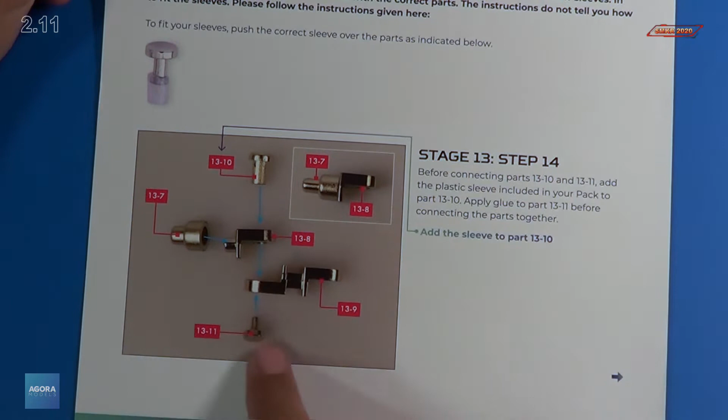There is an addendum to the instructions, and what's cool about Agora Models is they actually came out with additional instructions for building the fingers. They made some improvements on the fingers with these inserts here, and of course we will go ahead and put those in as we build the kit. I think it's fantastic that they actually included that with this.

You can see that they give us about 4 steps in stage 13 for this. So I'll pull this out again when we get to stage 13 and we'll follow these instructions then.

Here's the parts for stage 11, the neck and jaw joints. So I'll go ahead and pull these out and we'll get a closer look.

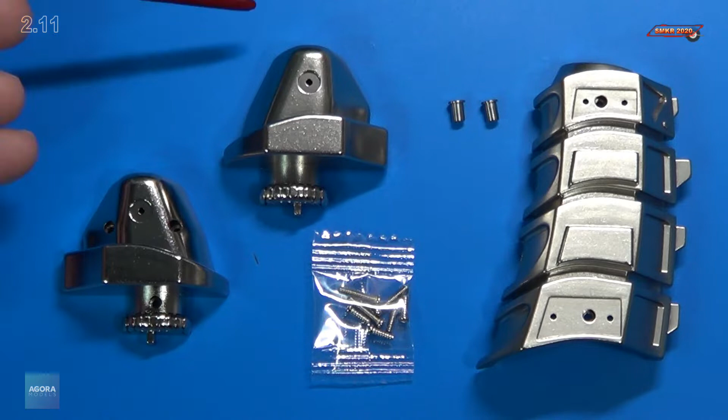Here's a close-up of the parts. We received the neck, 2 neck joints, and 2 brass bushings. We also received 2 different types of screws: 4 PB 2x6 screws, and 3 PM 2x10 millimeter screws.

I'll be right back. Here's a close-up of those screws, and the 2x10 screws have very fine threads, whereas the 2x6 screws have coarse threads, and they're both button head style screws.

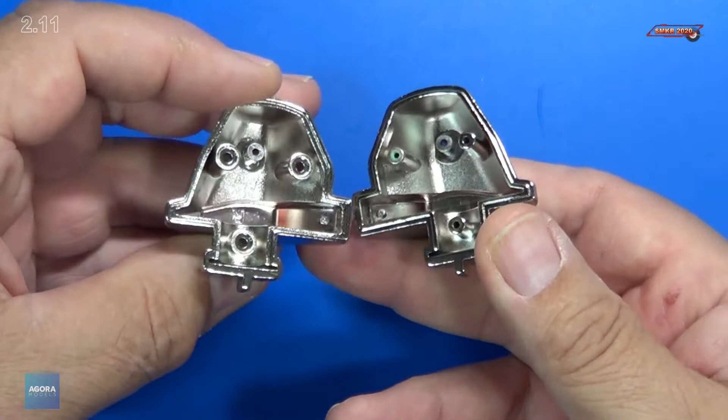So we'll simply match these sides together here. They are tabbed, with three markings there, and they want us to use 3 2x6 screws, which are the PB screws.

I recommend you use a 00 screwdriver for this because it has a smaller shank to it. It will fit inside the hole there a little bit better. Get it pushed down in there and get it started.

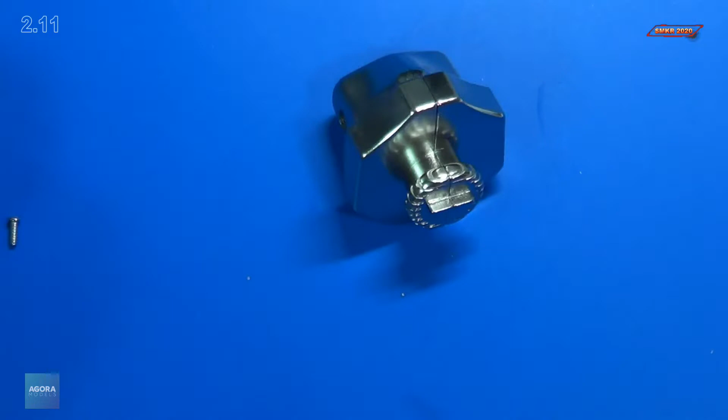And it's tight. And we got one more on the bottom. It's right there.

Keep pressure on it. There we go, that is it with that.

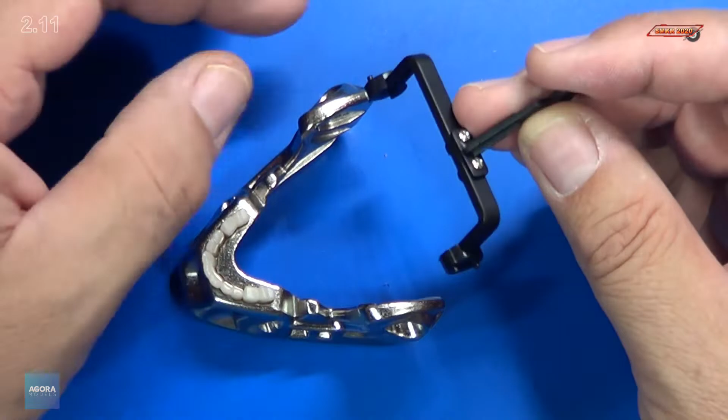Next, for steps 6 and 7, we need to get our lower jaw and head motor joint from stage 6 and 7, and we're going to install this just like that configuration. There's a couple of tabs on each side here, and it's simply going to go down into the sockets, just like that. That's how that looks there.

Next, we gather the lower jaw part from stage 5, and you'll note that there's an attachment point right there for a screw, and on the other side for a screw. So for step 9, we take and insert this just like that into that.

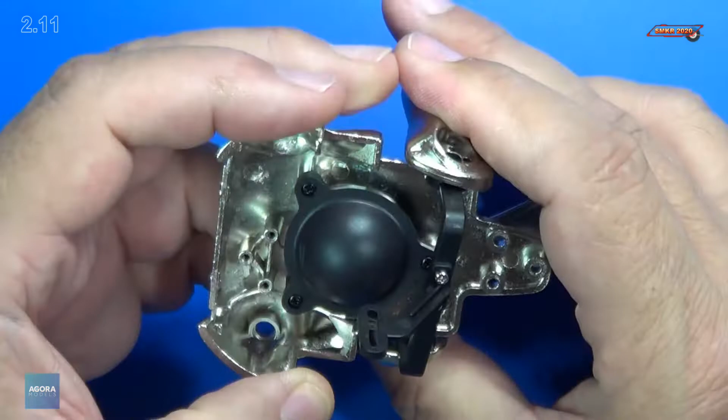It just slides up in there. It's kind of a tight fit. So once our jaw is in place, and we had to press it up in place here, very tight squeeze on both sides of the jaw joints, but they are lined up now. Our holes here are lined up.

The next thing they want us to do is put the bushing in. So we put a bushing in on the side. This is going to take us all the way through step 14 where we complete this build.

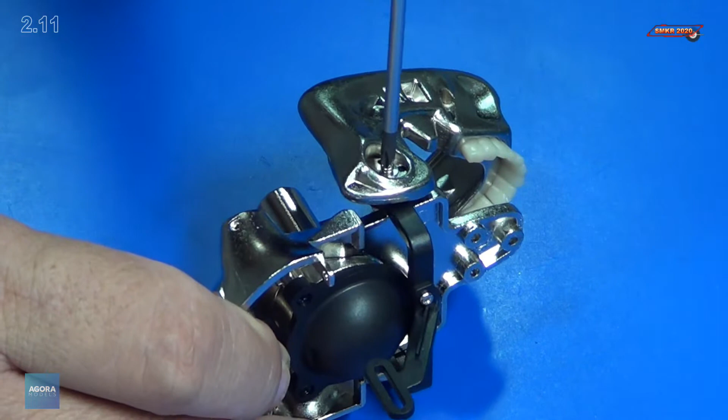So once the bushing is in place, then we can put our screw in, and that is our PM screw 2x10mm, and that's going to feed into some threads that are found in here. On the other side it's already threaded, which makes it nice, and I don't want to screw it down too tight, just till I have a little resistance, and that's it.

Do the other side. We'll put the bushing in on the other side, just like that, and put our screw in on the other side. Goes right down in there. Perfect.

And we've got freedom of movement there. You can see it looks good on this side, looks good on the front, and looks good on the other side. Very smooth operation, very precise, looks great.

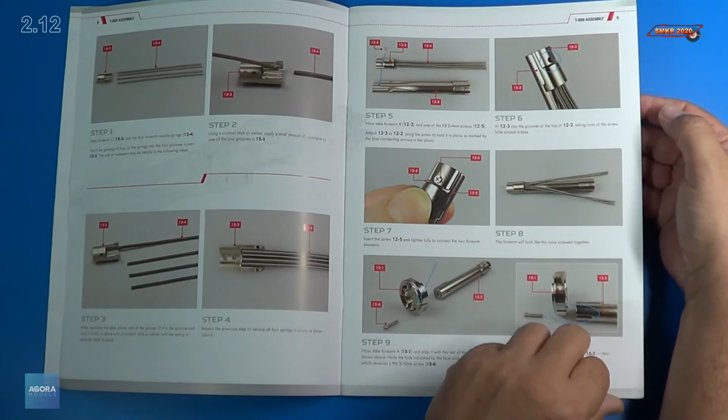And a total of 9 steps will be involved with this. So let me get the parts out, we'll get a close look, and then we'll start the assembly.

Here's the parts for stage 12. Let me pull these out, and we will get a closer look at these.

Here's a close-up of the parts for the right forearm. We received part A for the forearm, part B, and part C. We also received the forearm muscle springs and 2 sets of screws.

We received KM screws, 2 by 4 millimeter, and they are very tiny screws with countersunk heads. And then we received larger screws here. These are 3 by 12 millimeter, and they have a button head type screw to them.

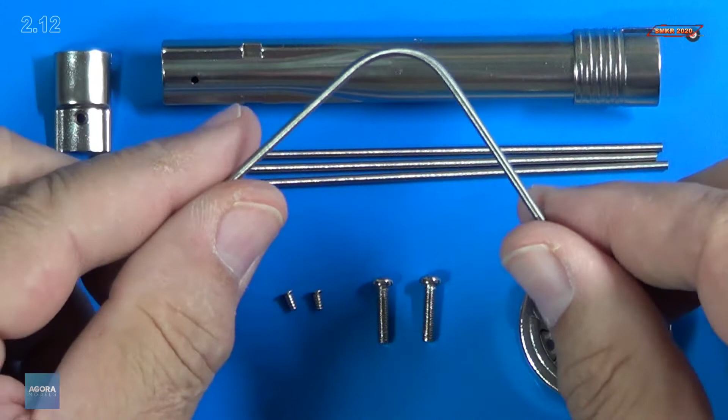The springs themselves are pretty cool here. Very springy. See that? I mean, they go all over the place. Pretty cool.

So let's get started. The next few steps require super glue, and this is my super glue of choice for this. We're simply going to lay down some super glue in these grooves here and put our springs in place and lock them down. To help the super glue dry a little faster, I'm going to use some accelerator, or what we call a kicker, at the end to lock everything in place.

So I'm going to take and apply my super glue where it needs to go. And I am using my super glue looper tool. All this can be found on my Amazon store. Just make sure I have enough glue in here on everything.

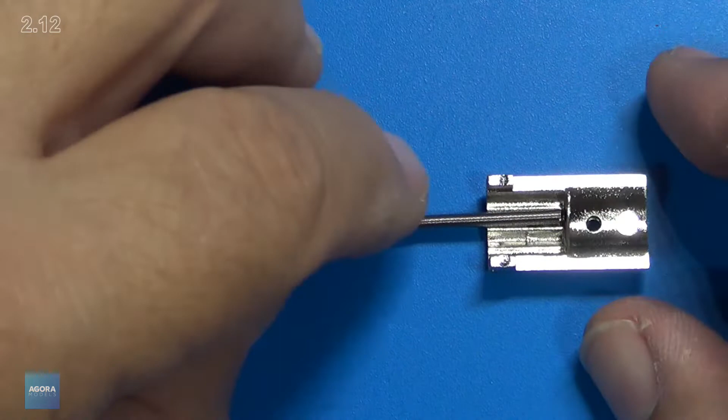Move the glue out of the way. Take our springs, insert those where they need to be. Again, the other one, and that one, and that one.

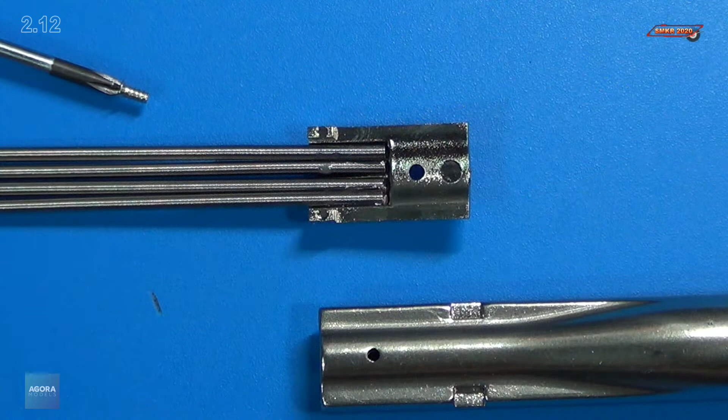Everything's inserted here. Take my kicker and hit it. Next we take the forearm and the connector here with the springs, and we insert that to line up with the notches, just like that. I did put a little extra super glue inside of here to make it a little stronger.

Now we're using those smaller screws, the countersunk screws, and that's simply going to lock this all down in place. Remember, all these parts are metal except for the springs. That looks good.

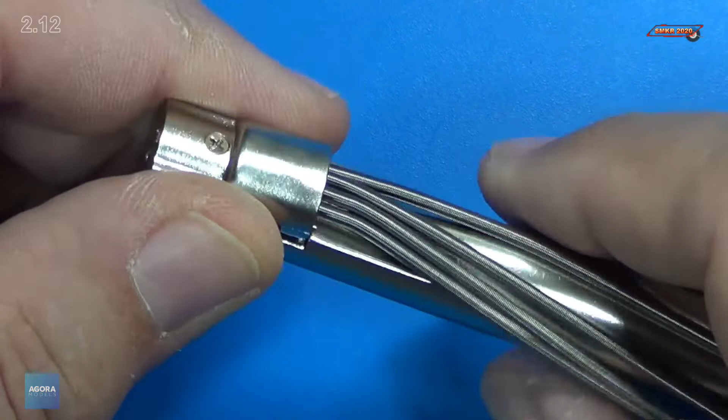Next we take our forearm. That's it, this completed, and we're going to insert this other piece of the forearm on the end of it. We're going to use a 3x12 screw, which is the larger one we received with this pack. The way it lines up is you have two sides to this arm here. You have this side that looks like that, has the indentation right there, and then the other side looks like that. So it's actually going to connect up with this up against the arm.

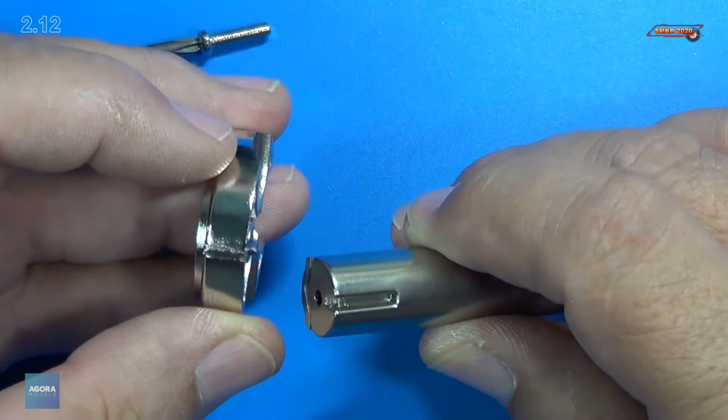Now what we need to do is line it up. We line it up with this groove to the groove that's found on there. On this side there's only one groove, so it's basically going to go on just like that. You can see there's a screw hole here and a screw hole there.

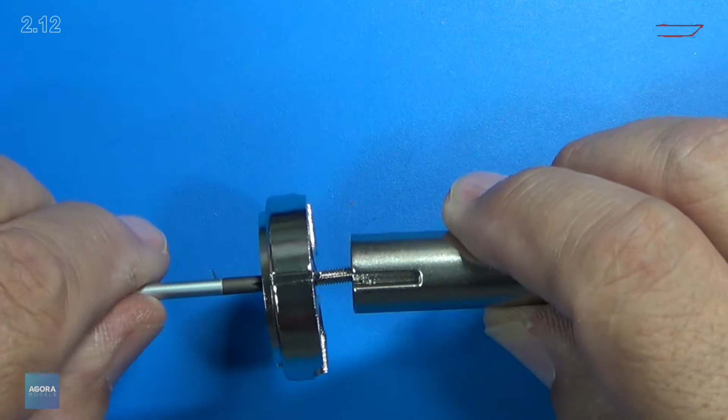I'm going to take my larger screw and put it through the end piece first, and then I can line it up from there. Just like that, and get the thread started. These are all plastic. You can see just gravity is keeping it locked in where it needs to be.

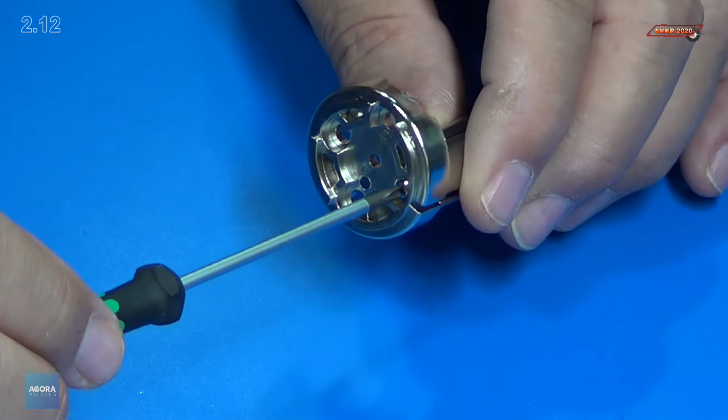Back it out a little bit. There we go. And push it forward. There we go. Perfect. Turn this around, we'll tighten this down on the other side here. And that's how it looks.

And that completes stage 12. Had a lot of fun with this too. I've noticed with this build we use a lot of super glue, but that's fine.

Welcome back. Let's look at the instructions for stage 13. So for stage 13 we assemble the neck and right finger component. Looks like we've got a lot of parts involved with that.

As I proceed here to the instructions themselves, we have 12 steps on 2 pages right here. Looks like we'll do the neck first for that stage, attach it to the head a little bit, and then we go to assembling the finger, and we have 15 total steps. So I'll get the parts and I'll be right back.

Here's the parts for stage 13. We get more pieces here for the neck, and of course our finger. So I'll take these out, we'll get a closer look, and we'll start the assembly.

Here's a close-up of the parts. We received the right side of the neck and some plastic plates. The neck is also plastic, and pieces of the finger. They call it the right fourth finger. And of course the new parts that are included with this stage.

And we received some PB 2x6mm screws. We received this nice letter of addendum for stage 14, step 11, and it lists the parts that are included here. Basically you're putting the plastic sleeves on these tabs here, and they give us step-by-step for that, so I'll take you through it and it shouldn't be a problem.

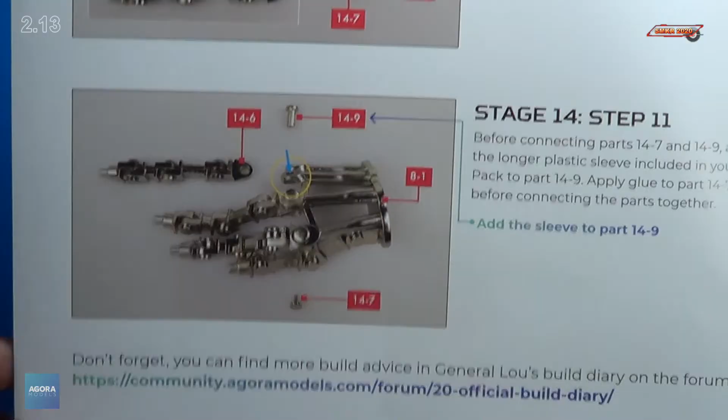In step 4, 5, and 6, we're going to assemble our jaw assembly we assembled from stage 6, and it's simply going to go into the neck here. Also, you have some alignment tabs there. You can see how they're positioned in this direction, and that's simply going to insert into that.

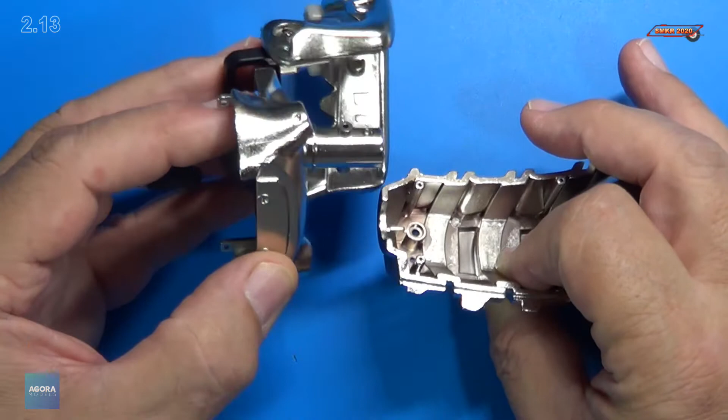It's going to insert just like that. Flip it over. Once again, putting our PB 2x6 screw into this. That's good there.

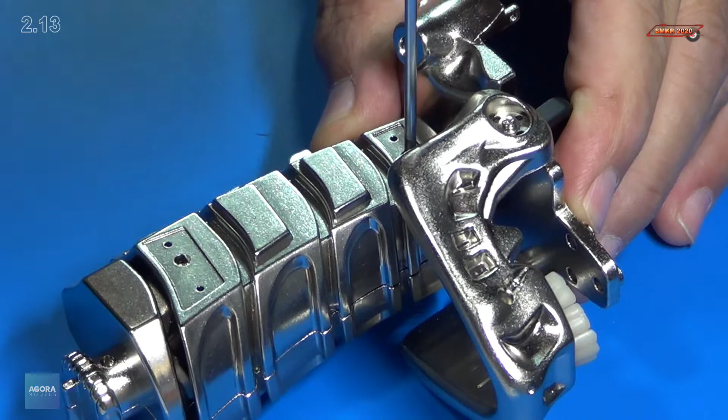Next, for steps 7, 8, and 9, we're going to put the other side of the neck on, and we want to make sure it lines up like it should. Snap, snap, snaps right down on it. We're going to put 2 more PB 2x6 screws into this. That's good there. One more on the bottom. And that's good there.

Now we receive these plates, and they are going to get installed on the outside here. Looking at these plates a little closer, you can see they are actually labeled. They have an L or an R on the back side. We'll go ahead and cut these off.

I have a really nice pair of Tamiya sprue cutters, and you can find that on my Amazon store. These allow you to get really close to it. You can just clean them off just a little bit here.

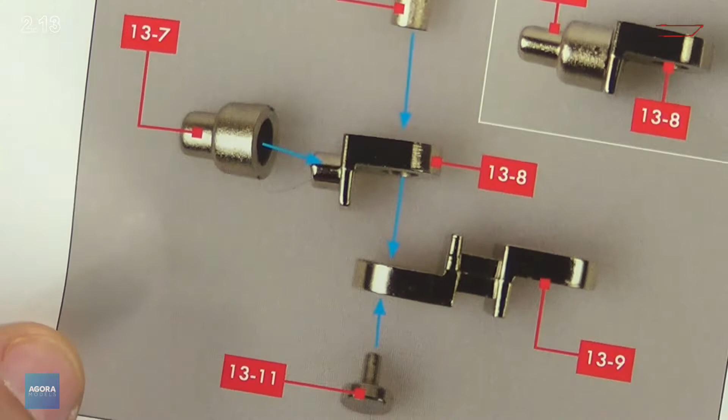I'll move that aside and we'll start on the finger. Here's all the parts for our finger. And remember, they gave us that addendum to add basically the plastic insert, and you can see how that works with that also.

We're also going to need some super glue for this, and I will use my glue looper to apply the super glue here in a minute. And this inserts into that.

This plastic insert goes over the outside of that, and we basically put these two together like this.

We put this through the top first, and through the bottom. Just like that, and they want us to put some glue on there. I think I'm going to have to apply some glue to this also, so we'll do both.

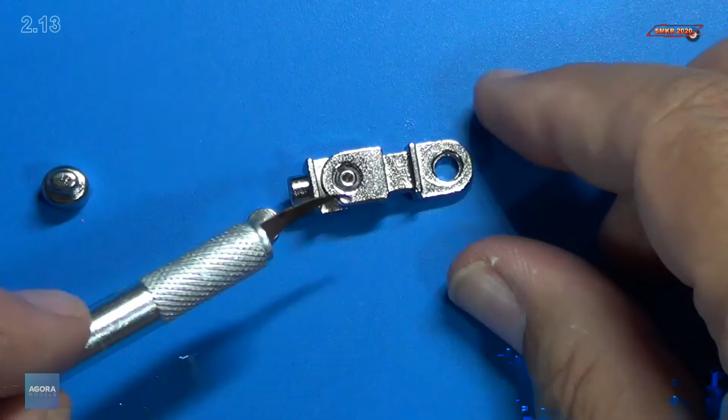Some glue on this, and some glue right here. It only goes on one way. There we go.

And then we put our cap in on the top, with the glue. Perfect.

Take a little bit of accelerator and hit that with the accelerator. It does give us a capillary action, so it should get into there, and that'll make the super glue dry faster. And that completes stage 13.

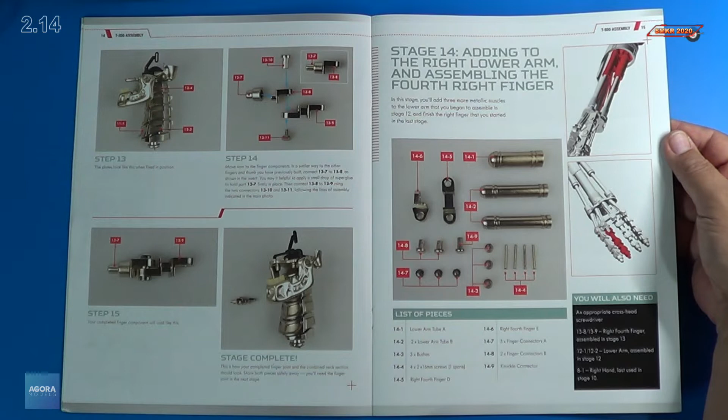Welcome back. Let's look at the instructions for stage 14. And here's the parts breakdown for 14 over here on the right. Got a lot of parts here. Looks like we're going to be building the right lower arm and assembling the fourth right finger, right there.

Look at the instructions, and we have a total of 10 steps on 2 pages here. We're going to be utilizing that arm that we built previously and assembling the arm and whatnot along with the fingers and continuing on with the fingers there. Looking great so far, all the way up to step 13. So let me get the parts out, we'll get a closer look, and we'll start this stage.

Here's the parts for stage 14. Lots of little parts bagged in here. Looks great, and let me pull these out, we'll get a closer look. Here's a close-up of all the parts.

We received the lower arm tube A and 2 lower arm tube Bs. We also received our finger components: the longer portion here for the knuckle, and the 2 other shorter ones are for the finger joints. We also got the 2 by 6 millimeter screws, there's 4 of them there, and we have the caps. Let's go ahead and get started on this assembly.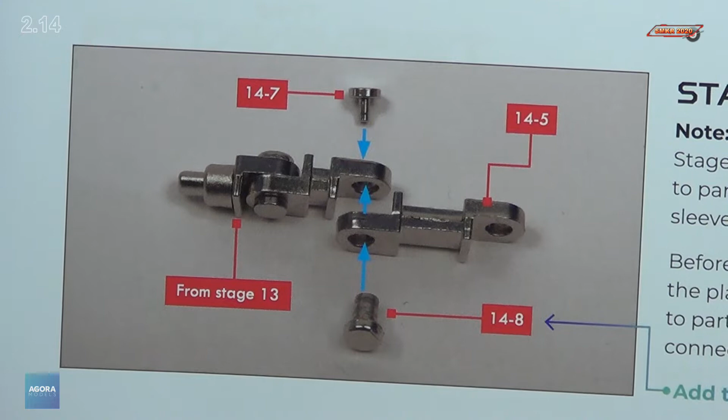And don't forget, our instructions addendum tells us about the new plastic sleeves that get installed on this, because they're not in the original instructions. So there's 3 steps provided for stage 14.

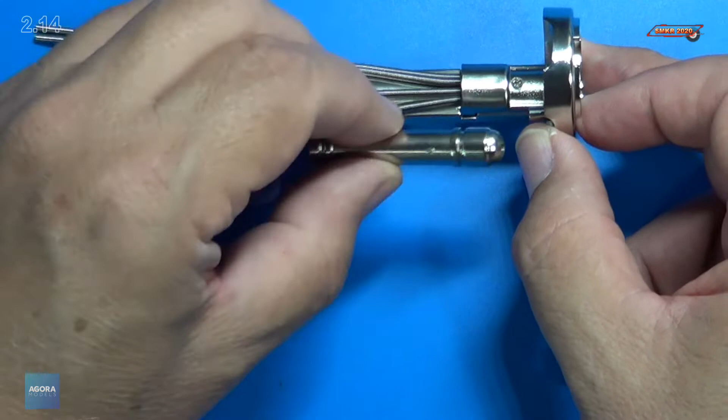Step 1 through 4, we're going to be assembling a couple of tube assemblies. We're going to start off to the right of the arm, there where the arm is screwed in to the end there. We're going to put the bushing in to the right, just like that. Then we're going to take our tube and mount it to that bushing, just like that. Then I'm going to take my screw and feed it through that.

And proceed to tighten it down. This screw is that real long 2x16mm screw. And if you can see that, until it's tight.

There we go, and you can see there's some give back and forth with that. I'm going to check it one more time to make sure it's tight. It is a countersunk screw. It looks great. We're going to repeat that on the other side.

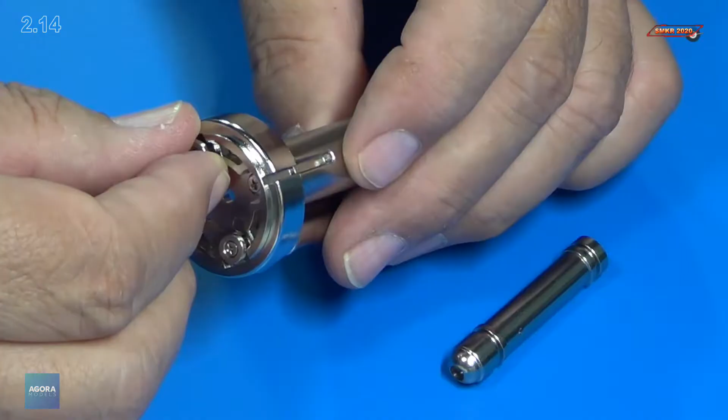Once again, we're going to put our bushing in on the other side here. Now this goes to, we'll be completing our step number 5 when we get this done. And we'll put our tube on that, goes on there very, very simply. Feed my long screw into that, the 2x16mm screw, and screw it in.

Perfect. So that's those two on there. Pretty cool, okay.

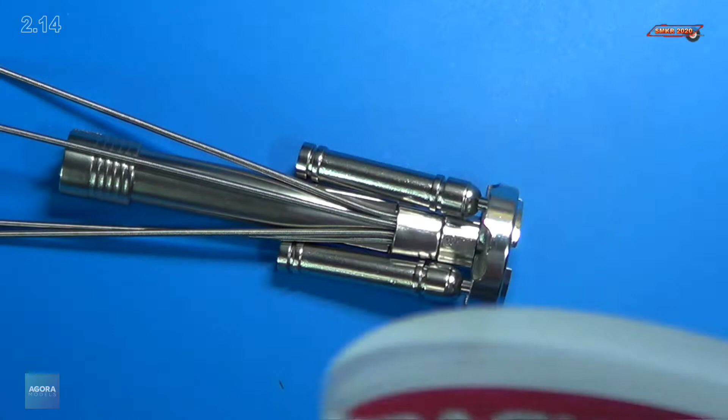Now we got one more to do. We've got the shorter tube. It's going to go in on the end here, much like the other. We're going to put our bushing in on the end of it, just like that. Get my screw ready here, insert the tube on the end of the bushing, put my screw in - a two by 16 screw - and secure it down. And there it is. All three of them are in.

You can see how they're all available here on the end cap. So that completes us all the way up to step 9. Now let's get to step 10, where we do the fingers.

We get our finger from stage 13 that we just assembled previously. We line up the two fingers that came with this kit. We install the Teflon just like we did before, and it goes in on the bottom here. Slide that through, push it through, just like that. That feeds through, through that.

Now we'll get the finger and put it on the hand. So we have our hand here. We're going to insert it right here for this finger. This is going to go just like the other ones, just like that.

So we'll get our connector ready. This is considered the knuckle one, which is the longer one. Put our Teflon sleeve on it - the Teflon sleeve is actually a little longer also. Perfect. Going to feed that through the hand first, just like that. We'll get our finger lined up, and you want to make sure it goes in that direction, down.

Take my pliers, squeeze everything together here. Holds pretty good when you do that. Take my super glue, tap it in the middle, in the center there. That's why I like this looper, it really gives you some precision. Take my cap, put it on top. There you have it.

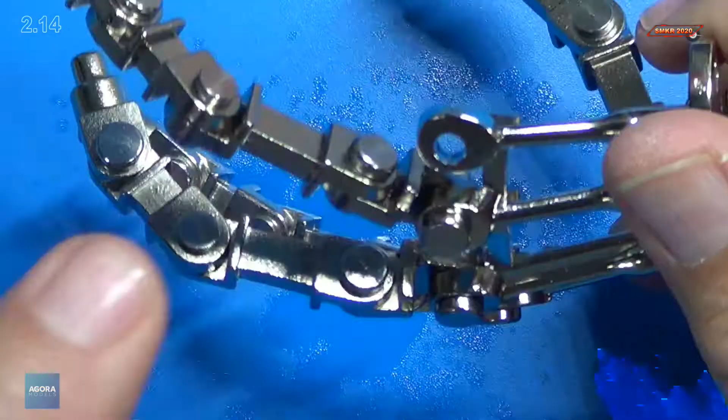I'm going to take my super glue accelerator, or my kicker, and I'm going to hit all these parts that I just glued. Capillary action will get them to work. And we got one more finger to do here. That looks great. I'll be right back. And that completes stage 14.

Wow, we did a lot here. It was a lot of fun getting the rest of this arm assembled, and relatively easy in that aspect, and assembling another finger for the hand. So stay tuned for stage 15 coming up very shortly.

Welcome back. Let's look at the instructions for stage 15. So for stage 15, we assemble part of the left head and the fifth finger of the right hand, which will be the last finger finally.

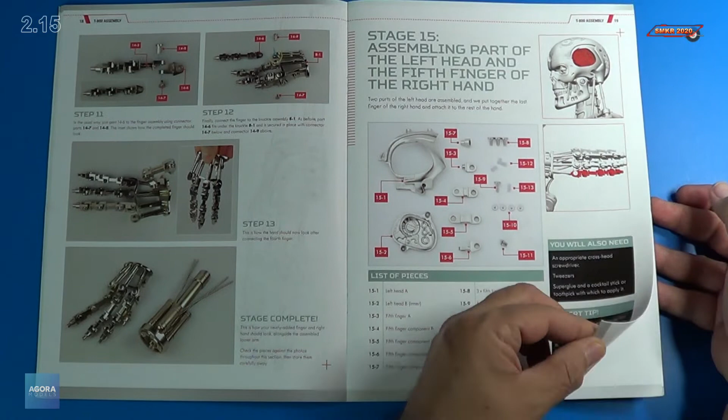So here's all the parts, and it's a good idea to take a really good inventory of everything that you've received in this pack, because you never know, a part might be missing. And what I have noticed, they always give us a spare screw for all the screws that we receive. So that's pretty cool. Looking at the instructions, we're going to work on the head first, and then after we're done with that, we're going to work on that last finger, and of course, install the finger onto the hand. So let me get the parts out, we'll get a close look, and then we'll get started.

Here's the parts for stage 15. And if you'll give me a second, I'll pull these out and we will get a closer look.

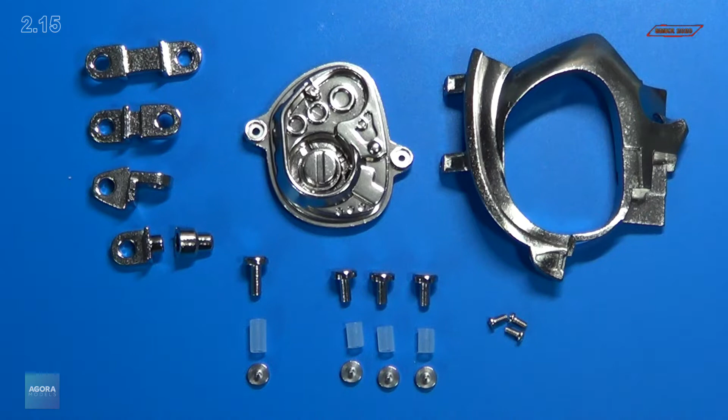Here's a close-up of the parts for stage 15, where we assemble part of the left head and the fifth finger on the right hand. We received the left head components, inner and outer, and the last components for the finger on the right hand. We also received 3 2x4 millimeter PM screws. So let's get started.

Steps 1 and 2, we assemble pieces of the left head, and we'll have to turn this around to do it. We'll put these 2 larger tabs on top just to give us a reference point. We're going to be installing 2 2x4 millimeter PM screws.

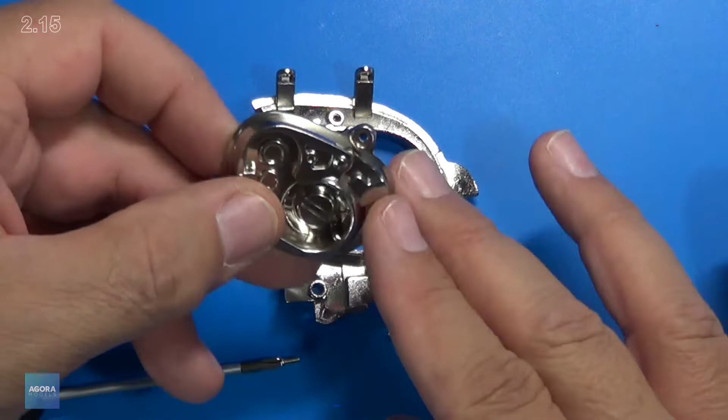We have the detail on this that needs to face the outside, so it needs to go down on top of it like that. We put our 2 screws in, one here, one there. It's already threaded, so we don't need any oil to help us out. And the last one, nice and tight. Very good. That's how it looks.

Let's get started on that last finger. To help us along, I'm going to use my super glue of choice and also my glue looper. Of course, you can find these on my Amazon store. I'll put some on a tray, these little solo cup trays are real handy for that. Some people use them for jello shots or something like that, I have no idea, but that's what they're used for also.

So this is our fingertip. They want us to glue this in place here. It's kind of an oval shape on the end, you can see that, so it needs to match up with the fingertip. I'm going to apply my super glue across that. The other side isn't completely round, it's oval, and we'll match that up. Boom, there we go, that's in place. That was step 3 and 4.

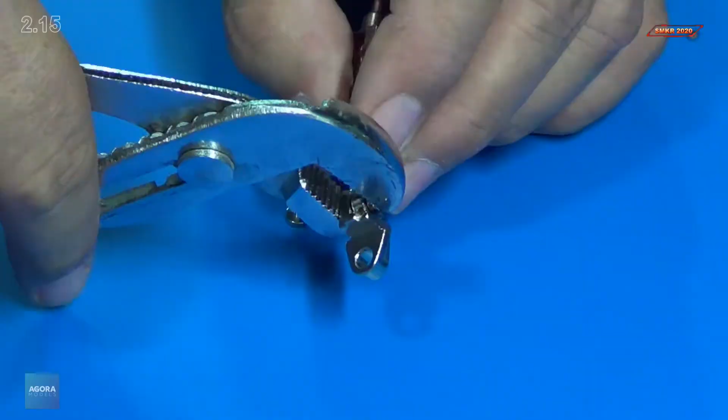Some more super glue, and we'll put our cap on. Perfect.

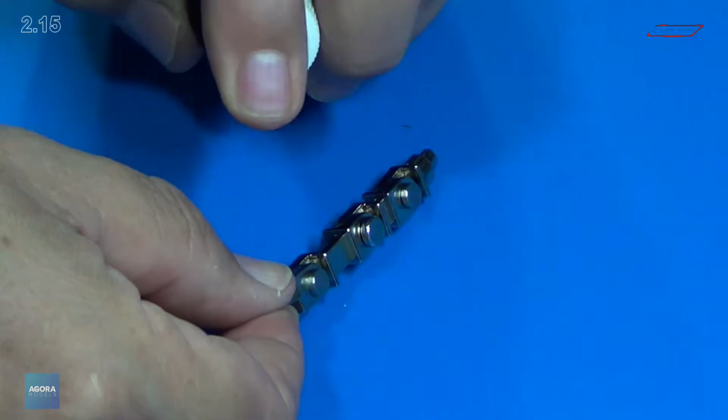To help the super glue dry, I'm going to use my super glue accelerator, or my kicker, and just spray. Capillary action will get it in there and help everything tighten down.

Now we're going to install this on the hand next. So we'll get our hand from stage 14, and with the rest of our fingers we have the last finger to do here on the right. It's simply going to mount up just as before, going in from underneath. Let me get a closer view for you, just like that. And we have the longer joint and Teflon bushing, so I'll go ahead and put that together.

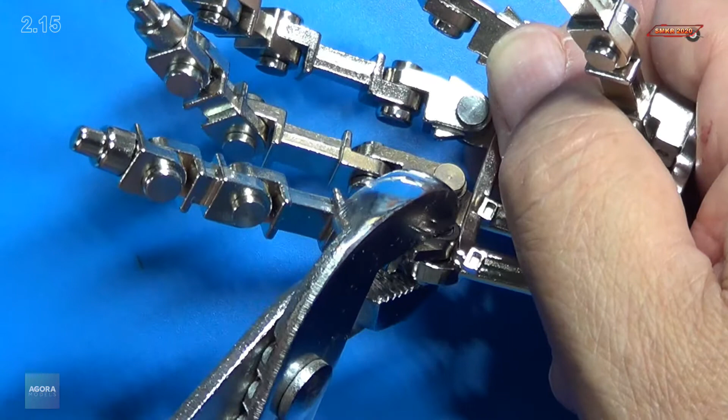It's going to go in through the hand first. So I'm going to lay it down on the bench, put it through the hand, press it through. Take my pliers, still try to push it through. There we go. Then we take our finger, put that on top, take my pliers to that again, squeeze it until there's no space. Looks great.

Take my super glue and I'm going to apply it to the middle. Take my cap and put my cap on. Perfect. To accelerate the super glue, use my kicker and we'll let that dry a bit. I'll be right back. I'm going to take my looper and clean it off with a lighter, just going to burn off the glue. Ready to use another day.

And that completes stage 15. Wow, got a lot done. We actually have one full hand complete right now. I think that's awesome.

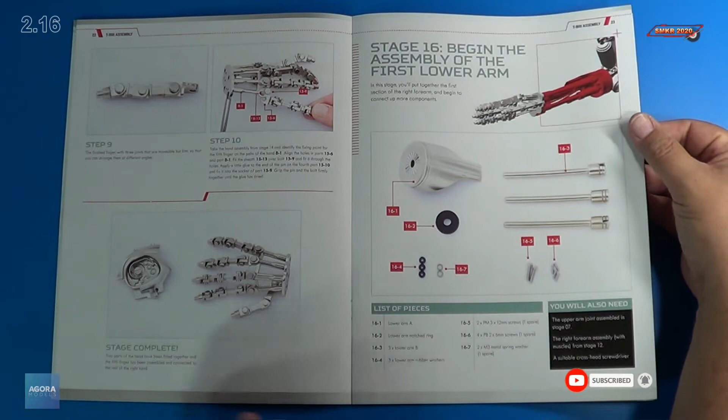Welcome back. Let's look at the instructions for stage 16. So for stage 16 we begin the assembly of the first lower arm. Got a few parts here involved with that, a few different types of screws. The first 2 pages are filled with 7 steps for this process, and a couple more steps after that. So we have a total of 9 steps for this stage. So let me get the parts out and I'll be right back.

Here are the parts for stage 16. Feels very light, so they're probably all pretty much plastic in here. But I'll go ahead and pull these out and we will get a closer look.

Here's a close-up of the parts. We received lower arm A, lower arm notched ring, and 3 lower arm Bs. These are all plastic. This is a rubber material. We received 3 lower arm rubber washers, 2 locking washers, 2 3x12 millimeter screws, and 4 2x6 millimeter screws. PM screw right here and PB screw right there.

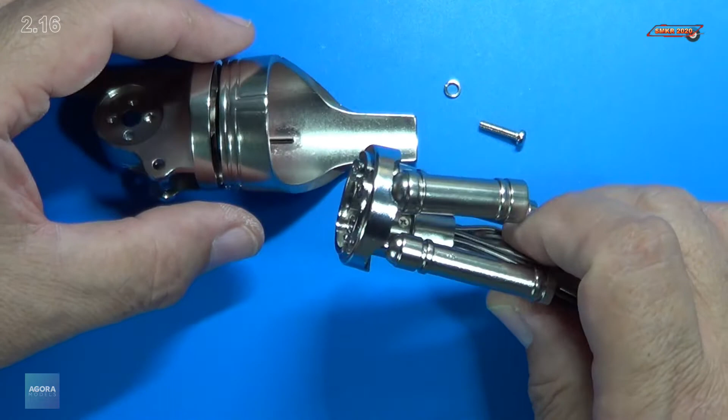So for our next part of this assembly, which is step 5, 6, and 7, we're going to put all these together here. First thing they want us to do is just insert this arm pieces here together, and you can kind of see they kind of ratchet around each other. You can kind of hear it. And then our arm assembly, there is a groove you need to line up here, and that's right there with the groove that's inside there. So I turn this over and line it up and throw it in there.

Now we take our PM 3x12 millimeter screw, we put our lock washer on the end of it, just like that, and we're going to feed this into the end here. You can might be able to see it in there a little bit. Turn it so the camera can see it better. And we're going to feed that through, just like that. And we're going to screw it in tightly.

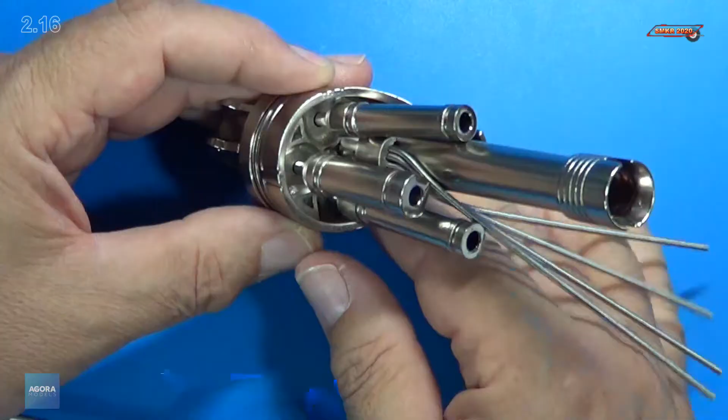And that will give us kind of a ratcheting motion. I could probably go a little tighter with it. There we go, and that's a little bit better. And you can kind of see where that screw is right there. Okay, let's put that aside.

Next we take the 3 lower arms and we attach the rubber washers and screws to them on the very end. So we'll take one at a time. We'll take our 3 rubber washers here, 3 of our screws, the 2x6 millimeter PB screws, and these will actually go in on the end. We pick it up with a tweezer, see if there's a difference between one side or the other, and there really isn't a side. You can see there's kind of a groove there. We'll get a screw here. We'll put it through one of the rubber grommets first, and then we'll screw it in on the end here. And there's one.

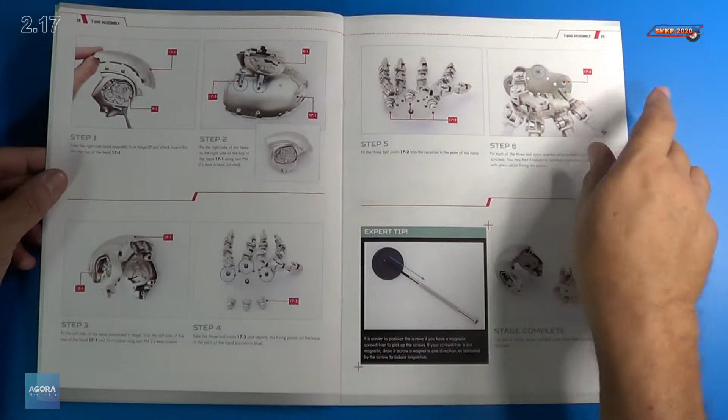They tell us it's easier to position a screw if you have a magnetic screwdriver to pick up the screws, which those Wera screwdrivers I've been using for the build are magnetic and they're fantastic. You can actually get these on my Amazon store.

So let me get the parts out and I will be right back.

Here's the parts for stage 17. I'll take these out, we'll get a closer look. It definitely has some weight to it, so this is obviously metal. This is the top of the head right here, and we also received 3 ball joint assemblies. Those are plastic. The head is metal, obviously.

2 different types of screws here. We received the 2x4mm screws, those are PM screws, and we received 2x6mm screws, and those are PB screws.

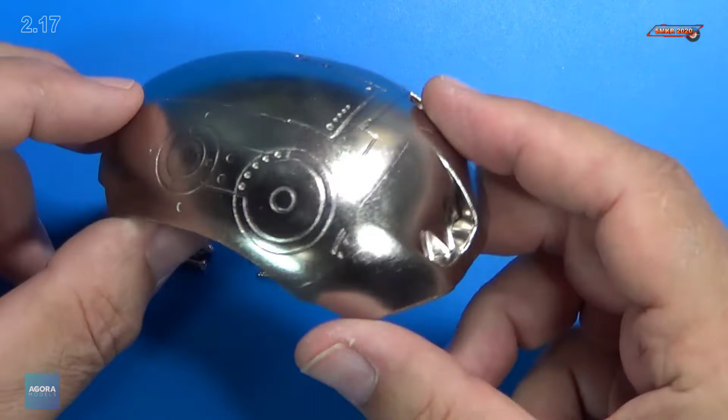So if I take the head here and get a closer look at it, it's definitely solid metal, a good chunk of metal, and you can see the detail here. Let's get started with this build. Looking forward to it.

Steps 1 and 2, we fit the right side head assembly. We'll take the top of the head, turn it over, and you have 2 installation lugs here. Just want to do a test fit to make sure they fit correctly. Obviously this goes to the other side, just like that.

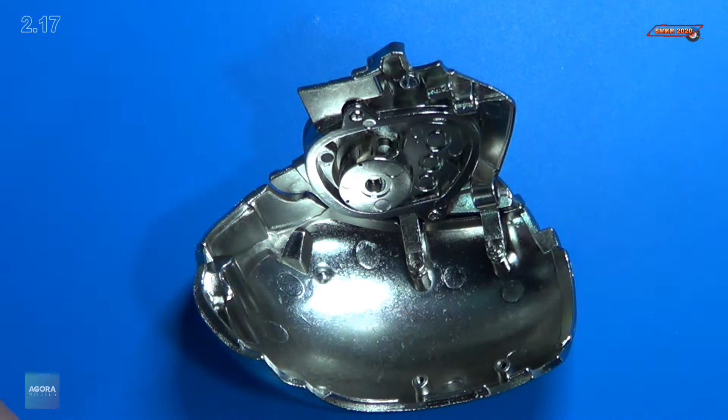They want us to put in 2 PM screws, 2x4mm PM screws. There's one. I'm going to leave it a little loose. Make sure everything lines up. There we go. And then we can go ahead and tighten both sides down. Perfect. And they want us to do the same thing on the other side.

It's nice with a magnetized screwdriver - you can pick up your screws with it, get it ready to go. Same thing, we're going to line up this side right here. The first one started, and it's working perfect so far. A little loose. And we got one more to do.

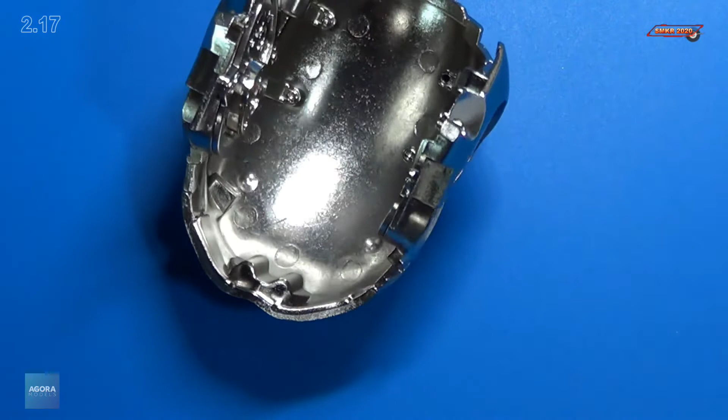You have to become ambidextrous using both hands for this build. We'll tighten these down now. And there we go. Perfect. I'll be right back.

With steps 5 and 6, we install these ball joints on the palm of the hand, and they're going to go in these 3 points right here. They should just go right in. We'll do one at a time. So we'll fit that in.

And we put in PB screws, a 2 by 6 millimeter screw. Once you have it in place, it shouldn't twist or anything. Let me turn it so you can see what I'm doing on the camera here. So hold it in place up against it.

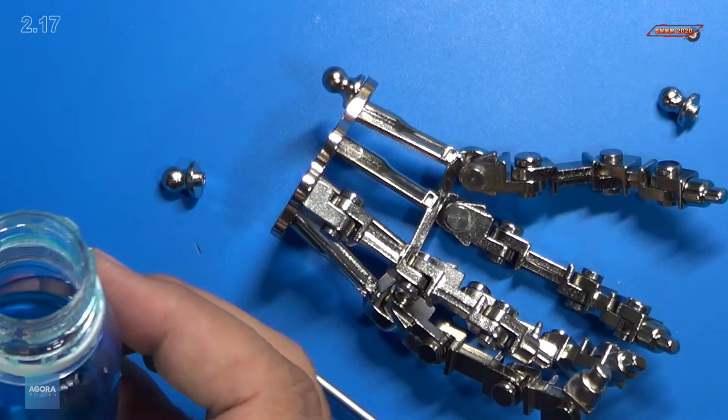I'm just going to put a little soap on the applicator, and apply it to where I want to put the screw into. Then I'll line that up, and it should offer some lubrication to that screw and make it easier for you to screw it in. Perfect. I'm going to do the same thing, put a little dish soap on this next one.

Got one more to do here. Looks like it's on the very end. So we'll put that in place and get the screw started. Just trying to tighten it down just a little more. Perfect.

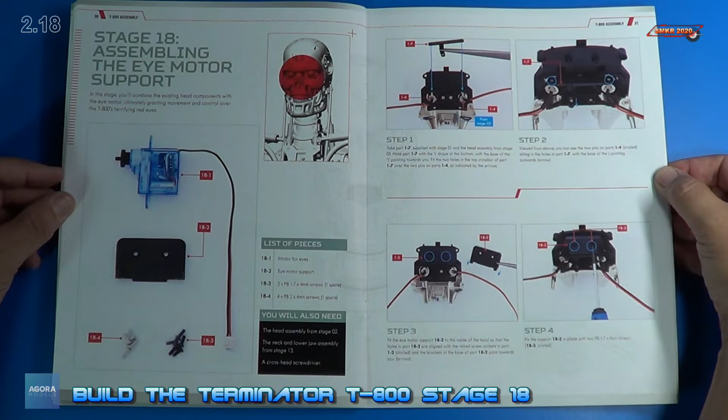Welcome back. Let's look at the instructions for stage 18. For stage 18, we assemble the eye motor support. We have 4 steps on the first page there, and to complete this we have a total of 11 steps. Pretty cool here, we're actually getting some of the motor components for the face.

So I'll get these parts out. We'll get a closer look, and I'll be right back. Here's the parts, and you can see we've got the little clear blue motor in there, wiring, and some screws. So I will go ahead and pull these out and we'll get a closer look. Here is a close-up of the parts.

Very cool. This can be one of my favorite things to do with this build, is doing the electronics. So here we received the motor for the eyes, and not a very big motor at all. It's pretty cool, pretty nice.

And we received the eye support, 2 types of screws. We have the PB 1.7 by 4 millimeter screws and the 2 by 4 millimeter screws. So the first time we've seen these black screws with Agora on this build. Remember, those are 1.7 by 4 millimeter.

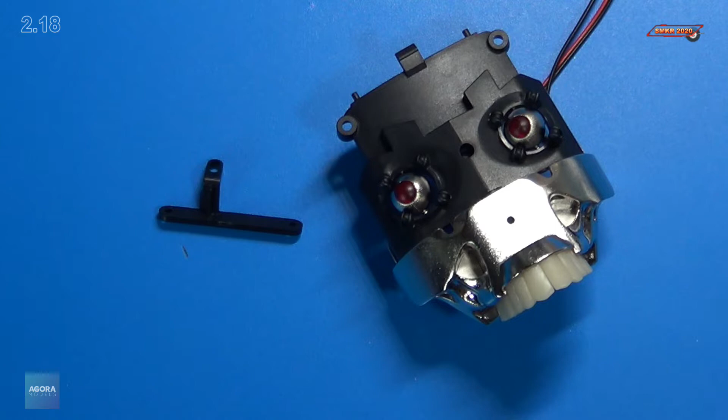I'll be right back. So we dig out the parts that we received from stage 1 and also from stage 3. We're going to take this headpiece with the eyes, we're going to turn it around. Remember this, we had this packed away for a little bit, right? This is going to have to go on top of those eye sockets. You can see there's some holes there.

So we insert one there and go to the other side and insert it on that one also. There we go. It's on both. See that? Okay.

Next we'll install the eye motor support, and just like it shows with those arms facing outward, we're going to put that in just like that. This is where we use those 1.7 by 4 millimeter screws to hold it down. Now we'll tighten both down now. Perfect. And that's how that should look.

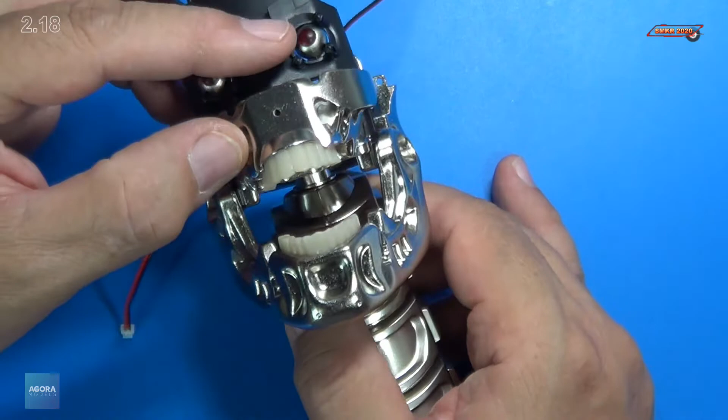Next we're going to fit the upper jaw to the lower jaw, and that's going to be steps 8, 9, 10, 11. So you can see basically we'll mount to these 3 points right here. We can see the attachment points right there. That's going to go right on top like that. Just lower the jaw so I can have access to it. I can even have access to the underside.

3 PB 2x4mm screws. I'm going to put the screw in first. See if I can get it to thread in. It took. Let's do 2 more. And 1 more.

I know it's hard for you to see. I technically can't see it myself, but I can feel it. There's 1. 2. And 3. And it's mounted. Looks very good. I think it's very cool. And you can see where they went into, just right there on the bottom.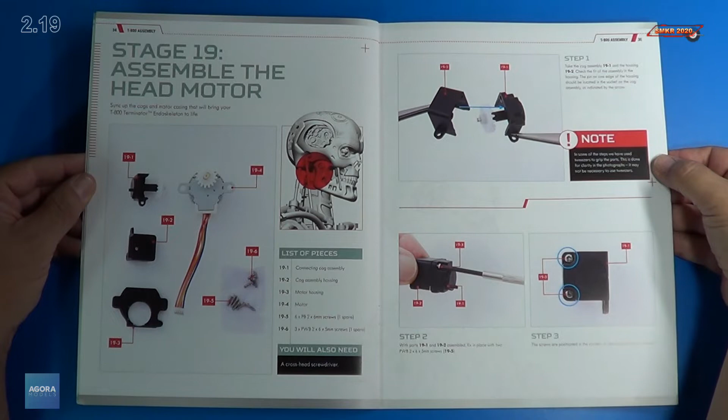For stage 19, we assembled the head motor this time. It was fun doing the eye motor last issue, so this one's really cool too. There's a special note here on the right side: in some steps we have used tweezers to grip the parts, done for clarity in the photographs. It may not be necessary to use tweezers. So when you see that, it's just so they can take a better photograph for us. We have 3 steps on the first page, and then all the way up to 9 steps for this. Let me get the parts out, get a close look, and then we'll get started.

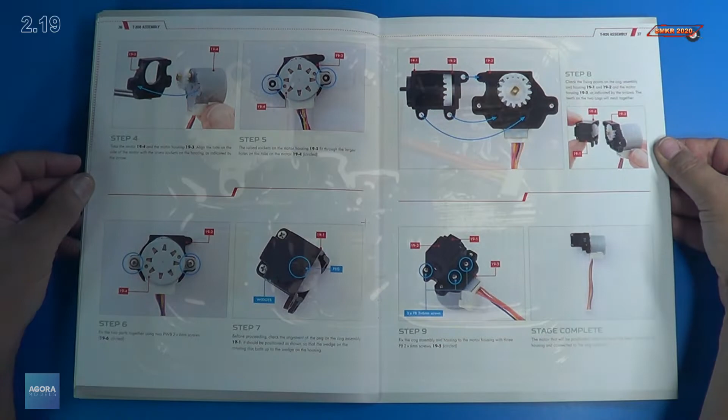Here are the parts, I will take these out. We'll get a closer look. Well protected there. I'll be right back. Here's a close-up of the parts. We received the connecting gear, as they call it here, the gear assembly housing, the motor itself, and the other side of the gear assembly housing. We received 6 PB screws, 2x6mm, and 3 PWB 2x6x5mm screws. And here's a close-up of the motor. Show you the gears on this side.

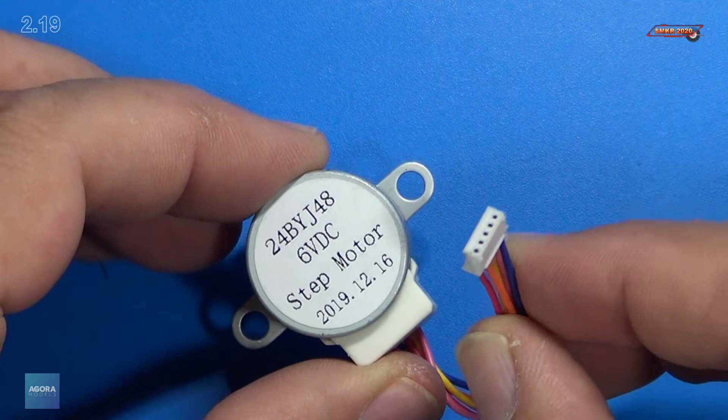It's a step motor, as they call it, and we actually have 5 pins going to it, five wires. So step 1, we pretty much just put the 2 housings together, and you can see we have our motor there. There's an alignment tab, same on the other side, and we just put that in just like that.

And we're going to use our PWB 2x6x5 screws, and we just put it in 2 places. So we will screw that in. There you go. Looks good there. And look like that's tight right there. Looks good.

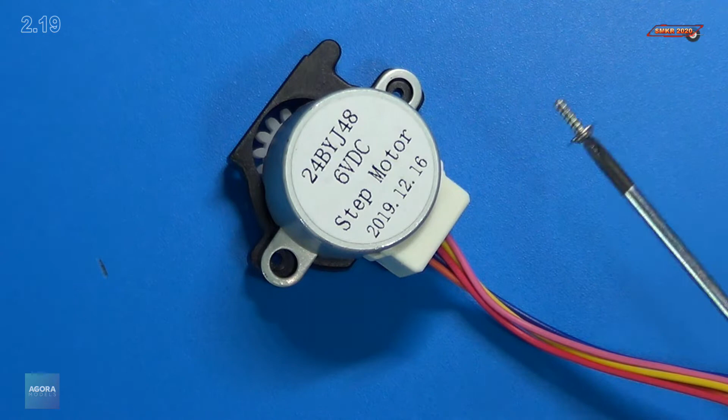Next we take our motor, we mount it to the housing. Now with the housing we want to have this notch here on top with the wirings running down below. So it's going to go just like that. This time we use the PB 2x6mm screws for this. You can see it has a wider head on it. We will put that in. Got one more on the other side. And all done. See how our motor sits in there in the housing. Looks great.

Alright, so before we continue on for step 7, we take our gear housing, and they want to make sure that you check the alignment of the peg on the gear assembly. It should be positioned as shown so that the wedge on the rotating disc butts up against the wedge of the housing. So we'll take and rotate this. I have to rotate all the way around the other way because they actually show it like that. Okay, you kind of see that. So this wedge right here is up against the housing. I'll back it off some so you can see it. We have this wedge here and the wedge there. It needs to be up against it. Okay, so we got that lined up. And the screws that went in here previously were the PB 2x6 screws. So the instructions had that wrong. There's a little correction with the instructions.

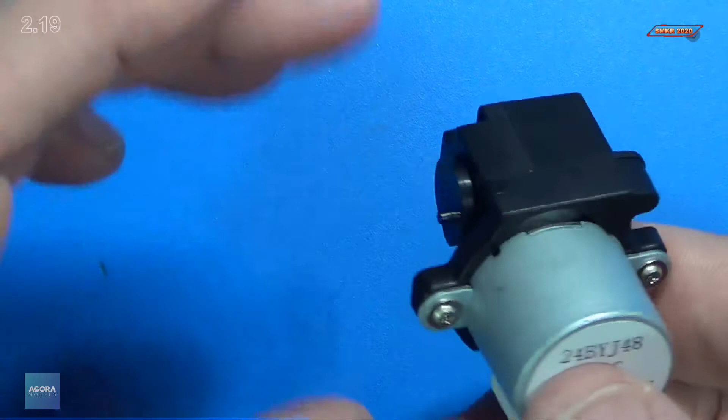I'll be right back. And that completes stage 19. We've done a lot so far in this pack. Had a lot of fun installing the motor here. Just the screw callouts were a little bit flaky on the instructions. No big deal though, you can figure it out as you go along.

I'm looking forward to the final stage, stage 20 of pack 2, which will be coming up shortly.

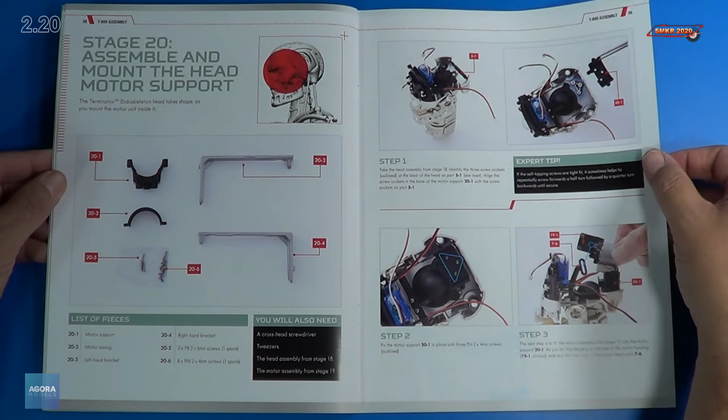We have an expert tip here on the right. It says self-tapping screws are a tight fit. It sometimes helps to repeatedly screw forward half turns, followed by a quarter turn backwards until secure. So in this case we may have to put a little lubricant on there to help it along.

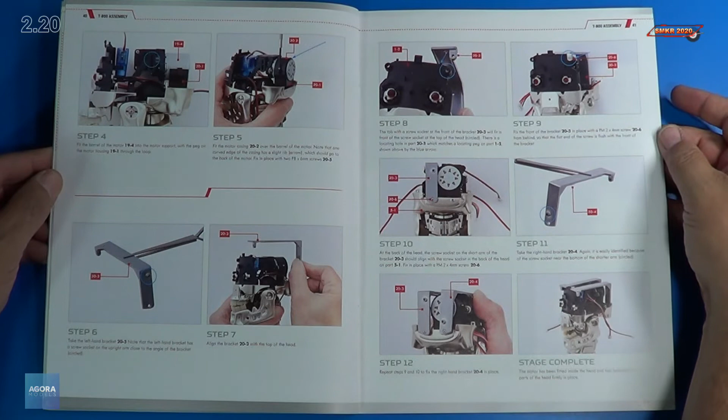We have a total of 12 steps here, a lot going on with the head and the motor. We'll be putting on all the support brackets. With that, I'll be right back with the parts, we'll get a close look at them, then we'll start this assembly.

Here's the parts, and you can see it has a little weight to it, so we definitely have some metal parts in here. Some brackets and screws. I'll go ahead and take these out and we'll get a closer look. I'll be right back.

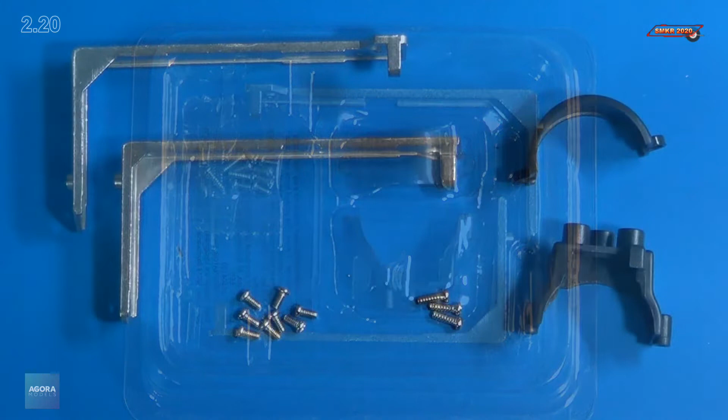Here's a close-up of the parts. Now both the motor supports here are metal, and then the motor casing is plastic. We received PB 2x6mm screws and PM 2x4mm screws.

I'll be right back. Now for step 1, they want us to locate where we're going to mount the motor support bracket right here. It has 3 holes on the bottom of it, and they line up with the 3 holes here on the back of the head.

Now these screws we're going to use are self-tapping screws, so that means they're not pre-threaded. So we'll go ahead and throw some Vaseline in those holes to lubricate them a bit. Make it a lot easier for me.

And we'll line up the motor mount. You can see the tab, it's going to go facing forward. So we're going to insert that down, just like that.

And we will put our first screw in. There's one. That's 2, and they're actually going in pretty easy. There's a 3rd one. And locked in, there we go. You can see they're in there now.

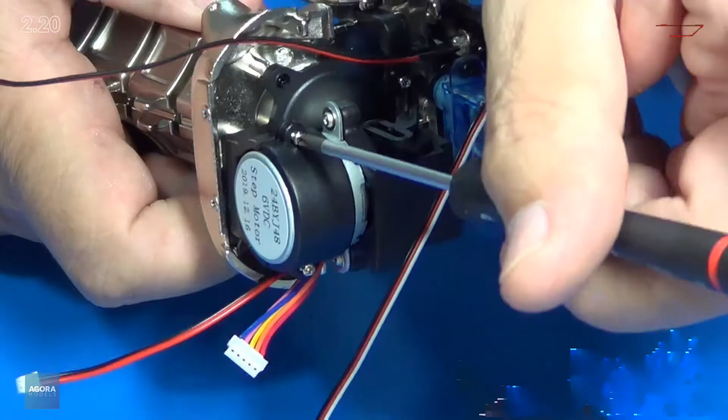Flip it over, get the other one started. So we're putting in the motor mount support, and just being very careful here, meticulous on getting these screws in. I'm going to get it tight. Do the other side here. Check the other side one more time. And there we go, motor support is fully installed now.

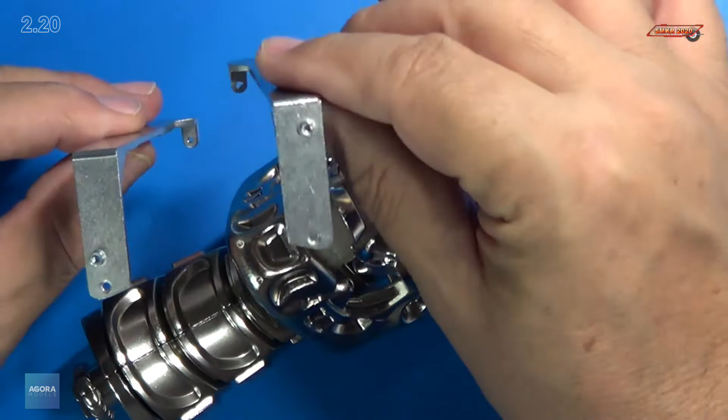Next we install the motor support brackets. The one we're going to be dealing with is the one with the screw attachment near the top of it here, so this one here first. And this one is going to mount to the left side of the head and on the back side here also, just like that. You guys can see that. And we mount this with 2 PM 2x4mm screws.

We take the other mount bracket, and you notice it had the screw hole near the bottom. We will mount that on the other side. Make sure it lines up on the back - it does. So once we have it lined up with the front screw in, just like that.

And we'll put the back screw in, line it up. There it goes. Tighten it down, we'll tighten the front up. And that looks good there. We have all our support brackets in.

I'll be right back. And that completes stage 20 and finishes up with pack 2. That was a lot of fun, and we made a lot of progress on this build. I look forward to Pack 3 arriving, where we'll get 10 more stages.